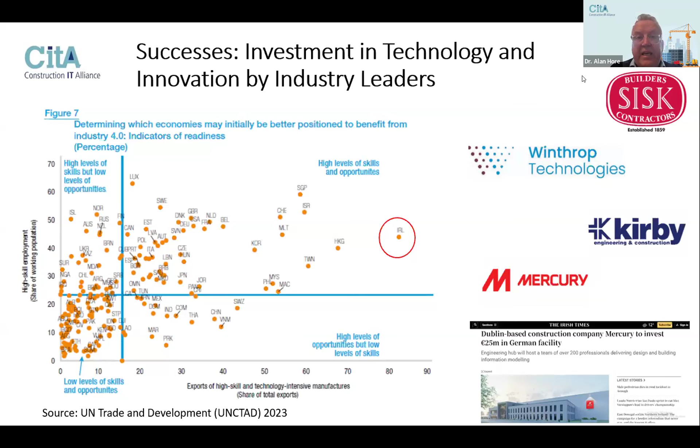The investment in technology and innovation in Ireland has been tremendous. And of course, we know the FDI footprint we have in Ireland as well. So again, that's another accelerant for digital adoption.

Construct Innovate have a specialist webinar series for it. The first houses in Ireland to be 3D printed in concrete in Dundalk. Harcourt Technologies have done fantastic work, winning all sorts of awards for their great work, and a proliferation of reports on MMC.

But if you look at the optics in the bottom of the screen here, I think there's a huge opportunity for us to work together with these particular individuals and groupings, and to really look at industrializing construction more. And of course, if you're going to use smart manufacturing and industrialize construction, you're going to need good tech.

Now, not to be overly negative, but I think the setback is definitely the slow uptake by small firms—and I'm talking about firms with anything less than 10 people up to 50 people, if you look at the definition. Certainly, according to the ESRI recent report, we can see that Ireland's micro companies are performing below the EU average, but then the larger companies are performing above the EU average.

Percy, thanks very much for inviting me to this. I'm delighted to have this opportunity to present here. I'm Michael Treacy, CEO of Acrow Global Limited, and it's a good chance for us as a company, an SME, really to talk about our experience of digital techniques and our digital transformation and how we've used it.

If I tell you a little bit about ourselves first, we're the world leader in the design and manufacture of prefabricated modular bridging. We've got about 300 people, 2 manufacturing facilities in the UK and the US, and we work worldwide - we've worked in over 150 countries. We'd see ourselves as experts in advanced steel technology. This is just one flag for each country, so you can see we've been all over the place.

Just as an example of where we're working at the moment, obviously the UK and the US, Greece, Ghana, Uganda, Angola. We're doing work in Papua New Guinea and Brazil. So we've got a wide range from what we do.

In terms of what we do, we make steel bridges and we make a number of different bridges, but basically it's all high quality, high strength steel. Now, the one thing about being able to export all around the world, it's really important that it fits together. So we've used robots for quite a number of years. In terms of productivity, and it was interesting listening to Alan there, we upgraded our robots in the last number of years, and we were getting at least a 40% productivity improvement from that. So it just shows you the advances that are made.

These bridges are robust. They're easily configurable to take quite a lot of load, long span. And the big thing is it's accelerated bridge construction - we can put these in very quickly with minimum labor, with just some supervision.

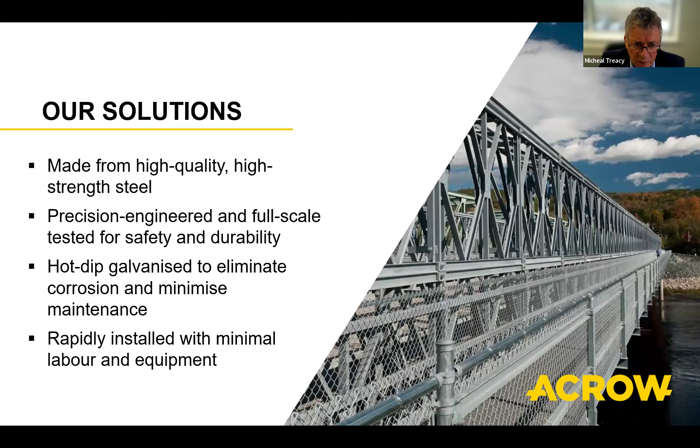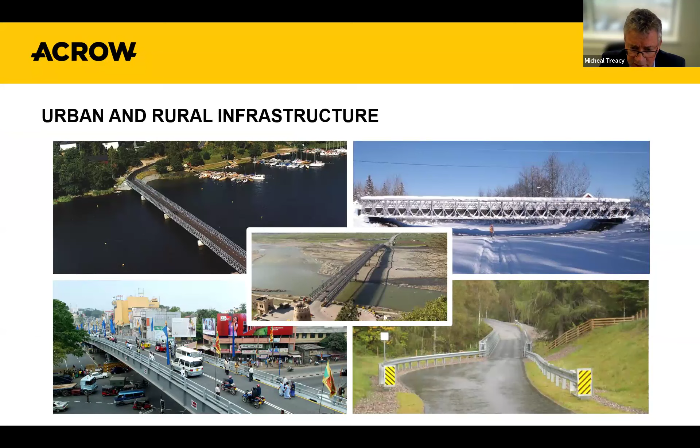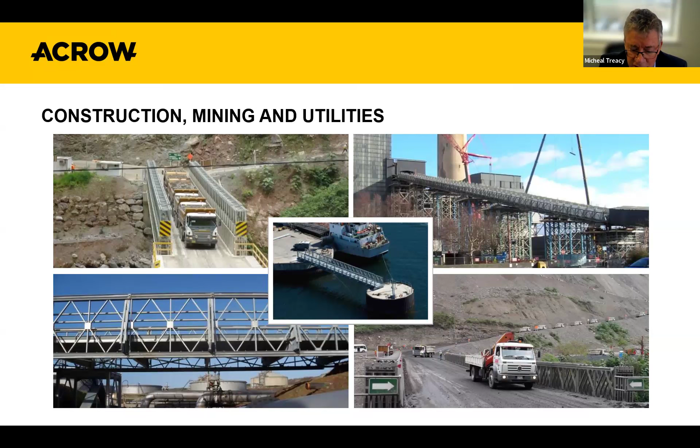They actually deliver bridges in places like Malaysia. And last year, we've done 30 bridges in Ukraine, which we're very proud of. So we both sell and rent bridges worldwide.

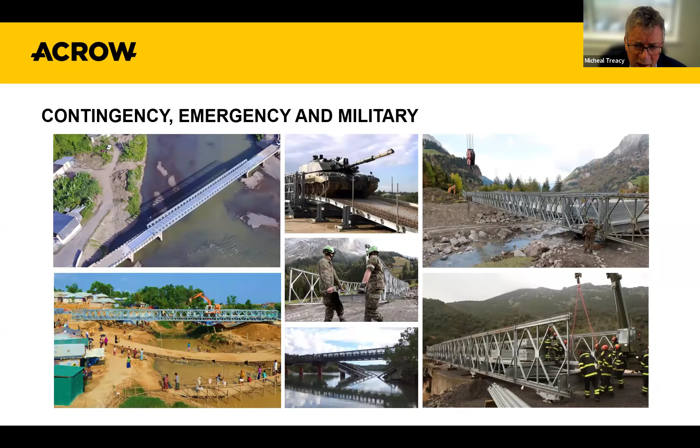To finish talking about ourselves, it's a very basic technology in a lot of ways. We have a launch nose in front of our bridges, and we push them out. But it's really important that they're robust, stronger, longer, and have more capacity than what's available.

So we looked at how we could improve things. The big thing for us was we looked at digital improvements and digital transformation, really on the back of three pillars: innovation, efficiency, and a real customer focus.

The first thing we looked at was from a customer point of view. I think we wouldn't be unusual in this, that lots of companies have legacy systems, and the danger is it tends to be siloed. We looked at mapping a customer journey from first contact to actual installation, and sometimes we were surprised how we were able to do anything at all, because people were sharing stuff on emails, possibly sometimes working on different revisions.

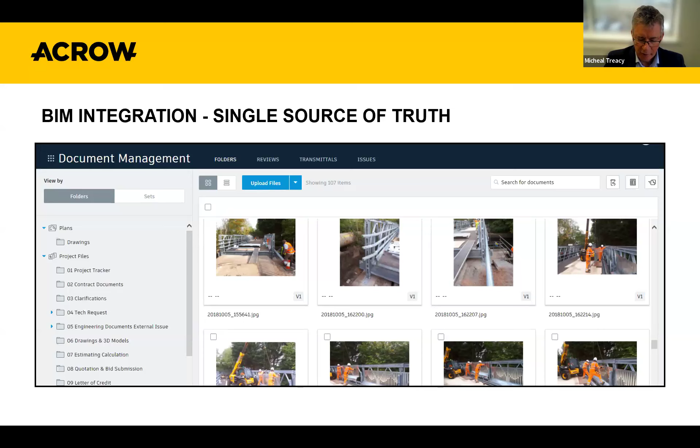So we looked at having a common platform, a single source of truth. I'm sure plenty of people have this already, but we use BIM 360 Docs, and it was quite a transformational point to have this single source that we could use from the very start, with our guys on site being able to communicate, access that on site, and actually upload updates from there. So that was a really big improvement.

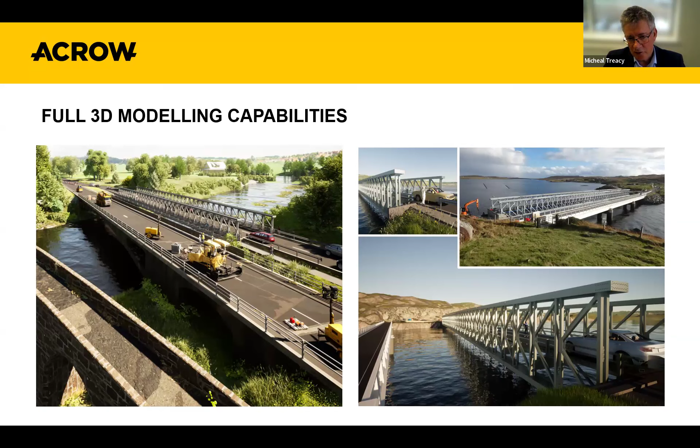I think this is an example of a bridge in Canada, before and the actual afterwards. We've always prided ourselves on the realistic nature of our renders.

Some other techniques we're using include virtual reality, which is a very useful way for customers to actually interact and understand their bridging. We either send them a model and they have a headset, or they come here and can walk around the bridge and play around with it, and it's useful.

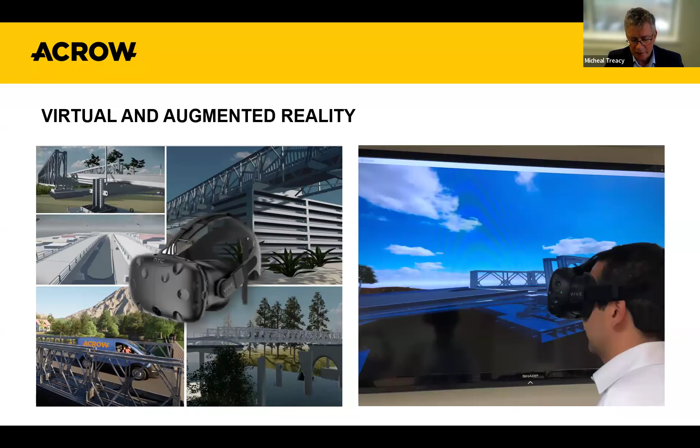And augmented reality, again Alan mentioned that. We've started to use that, and we think that's of huge importance going forward, and we're exploring that in quite a big way. We developed an online configurator.

Anyone who's tried to buy a car recently knows you can configure it. We did the same with our bridge. If you go on our website now, you can design your own bridge, and it comes up with a 3D model that you can play around with, and that's useful.

The other thing we've done, like a lot of companies that send installation manuals, is that sometimes they're so big and cumbersome you almost need a wheelbarrow to carry them around on site, and that's not how people absorb information any longer. So we now use interactive installation guides, and that's been hugely useful. People have an iPad and can actually look at a position and how they put stuff together. And we're looking at augmented reality for that as well.

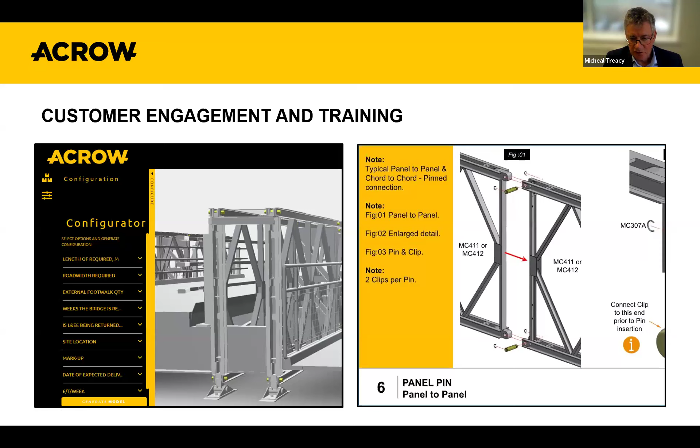We're looking at where we can use it much easier, where there's a QR code or whatever, and you just point at a particular part of the bridge and it actually explodes it, so you can really see what you're doing. So we started to develop that, and that's going to be ongoing.

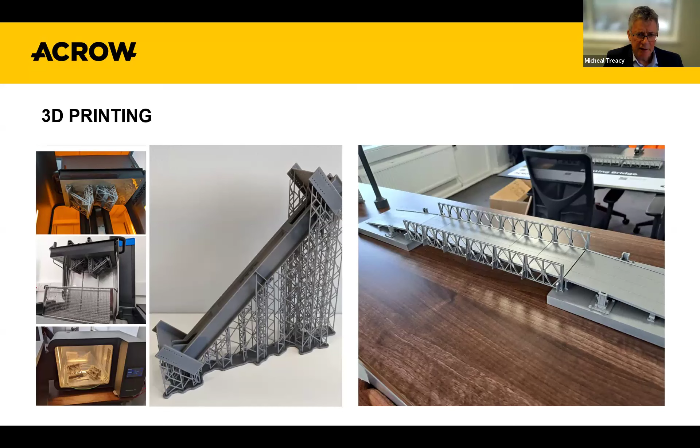We also 3D print all our prototypes, and that piece in the middle is an example of an end post from one of our bridges to a launch nose. That would be 5 meters in height. Rather than make a full scale and then have to amend it, we were able to look at how it's produced beforehand. Again, useful. We also do some 3D printing of ancillaries like deck plugs for the bridge. So it's a useful way for us to continue to innovate.

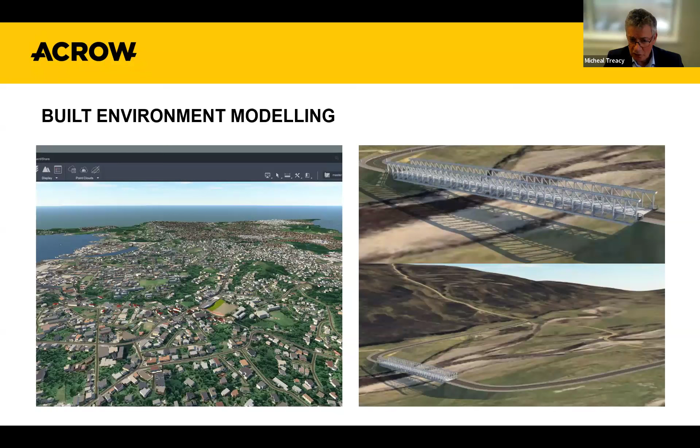I mentioned that we're very keen on our renders being realistic. We use built environment modeling, so we actually use the actual terrain using InfoWorks. That's an example of a town in Fiji. We're able to use bridges, and it's quite useful to not just have a good looking model, but actually see the real terrain so you can look at the road alignment and do a lot of surveys from the models we have. So we found that really useful.

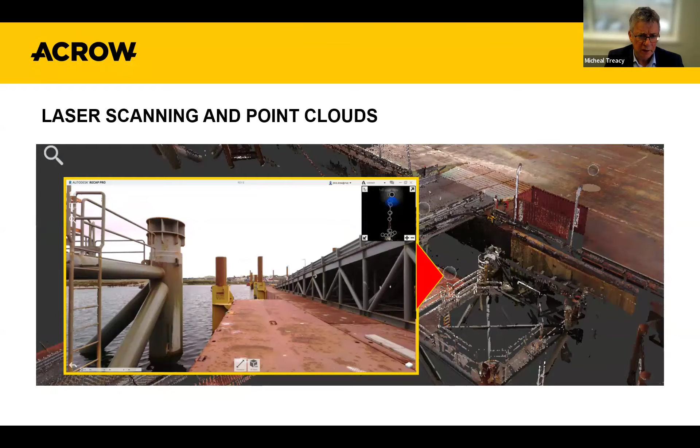We develop quite a lot of projects as well. We're doing a 100 bridge project in Africa at the moment, and we're using drones to survey the areas beforehand. We also use Starlink so that we have a connected team no matter where they are in the world, and that's been very useful. So all our site advisors are equipped with drones, and it's been useful.

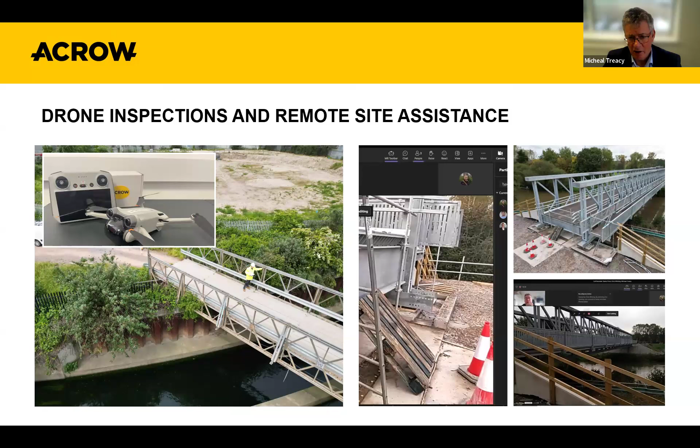One of the things we're very interested in and excited about is remote site assistance. What this is, basically, is if there's parts of the world we find it difficult to get people into, you can send them some glasses that they wear with a small computer on their back, and you can actually see through their eyes. You can mark up the structures, and they can see where you've marked up. They can walk around to it. You can send them drawings and models, and they can pull them out and put them in the periphery vision. This has been extremely useful. We've used it in a number of projects, and we'll continue to do that. So effectively, you're there when you're not there, and that's been extremely useful for us.

As an example of some of the techniques we're using, we mentioned the background tool was all about how to improve innovation, and it certainly has done that. Efficiency, again, it's made us much more efficient. We put a lot of investment in technology, and it's really paying off. But the customer focus is the key thing. It's made it so much easier for us to work with customers, and I think that's something we're going to continue with.

So what's next for us is, like everybody, an increased focus on sustainability. We're ISO 14064, so we know what we do. We've got a carbon plan for ourselves. We now need to look at scope 2 and scope 3, and we're using technology to look at whole life carbon costing and what that means. I think generative design, we've done a little bit of that, and that's going to be becoming more into some wacky stuff that comes out of it, but it's something we think we need to do more of. We've started with digital twins, really to backdate our catalog so we can have a much more user-friendly understanding of what we've done before.

Equally with our facilities, it's useful to have a digital twin of the factories before you put in investments, so you can actually see how things work rather than just take out stuff and put them in and make mistakes.

I think the other thing is just continuing with collaborative technologies. Our industries aren't necessarily collaborative enough. It's adversarial by nature at times, and that has to go, and we all have to start working more together. We've found, and we're continuing to use, technologies that are much more collaborative, both for ourselves and customers.

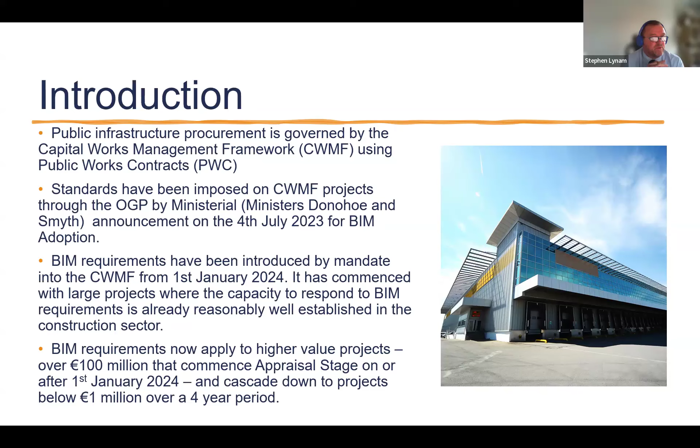Following on from that, BIM requirements were introduced by mandate into the CWMF suite of contract documents from the 1st of January this year. It's commenced with large-scale projects, projects in excess of a value of €100 million that have commenced appraisal stage on or after the 1st of January 2024. The plan is then to cascade down to projects below 1 million over a 4-year period.

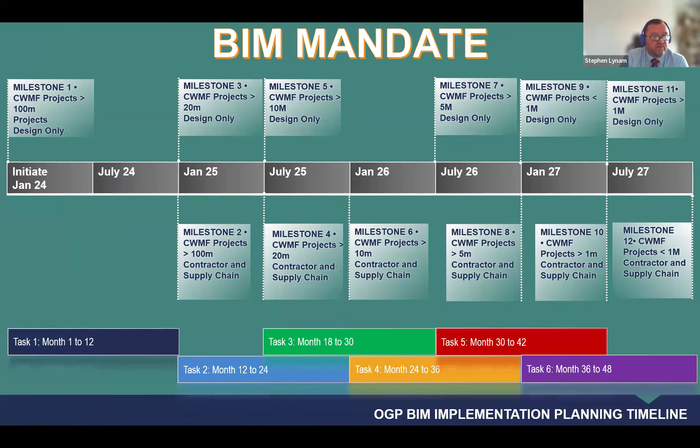This reveals our BIM timeline for the introduction of projects. At the top of the dates that you see there are for the design phases, and below those dates are when the contractor and supply chain are going to be required to have BIM as part of the development of the procurement of any government funded project in excess of 50% funding from the state.

And to try and bring that into a more visualized process, we're looking here at the BIM adoption timelines. So at the moment, this is where we are. We have commenced the implementation of BIM requirements through the mandate for projects in excess of 100 million, where a design team has been appointed on or after the 1st of January 2024. So very shortly, we'll be starting the second phase of that.

Contractors engaged on a project that has commenced design appraisal from the 1st of January 2025 will be required to have BIM as part of their delivery phase. Also on that same date, design teams appointed for projects of a value greater than 20 million and less than 100 million will also be included in the next step.

The reason this was done is we believe in the current industry, where construction is being digitized, the skill sets for that reside with the larger companies at the moment. The whole idea is that the larger companies will see the value in delivering some of the smaller projects and bringing that skill set of BIM management down through projects of lesser values over a period of 4 years.

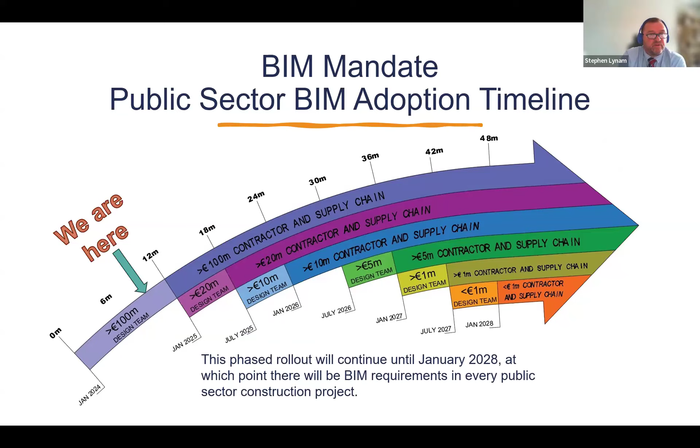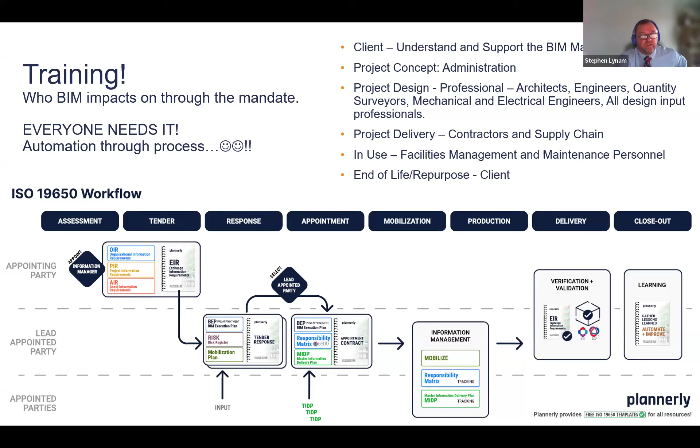So digitalization of the CWMF is the next thing I'm going to move on to. The suitability assessment questionnaire is our pilot project.

At the moment it has two forms. Part A is where part one is filled in by the contracting authority and part two is filled in by the bidder or the contractor. It goes through a whole approval process. There's an evaluation done to make sure the contractor has the capability to deliver a project. Then it gets approved and they may go to a tender list. Our plan is to digitize this process.

At the moment, for a project roughly valued at around 7 million euros, there's about 700 to 900 hours involved between all the personnel in going through this suitability assessment questionnaire, from its development right through to when it gets returned to select contractors of suitable status to deliver a job. There's about 25 documents involved altogether, and we want to integrate them into a digital portal where the submission can be done online.

It'll also have the capability for what we call client passports. There'll be a client passport for contracting authorities, so they'll have all of their information uploaded into the system once. Every time they use it, wherever information is required, it'll automatically populate the documents for them. So it's the enter-only-once principle.